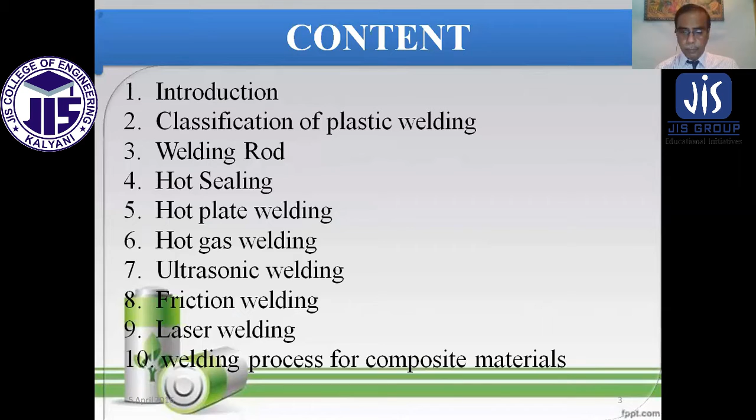Introduction. Mechanical fasteners, adhesives, and welding processes can all be employed to form joints between engineering plastics. Mechanical fasteners can join two components quickly, but they do not provide a leak-tight joint, and localized stress may cause them to pull free of the polymeric material.

Adhesives can provide good properties and fully sound joints, but they are difficult to handle and slow to cure. Also, joint preparation and surface cleanliness need to be given importance in adhesive bonding.

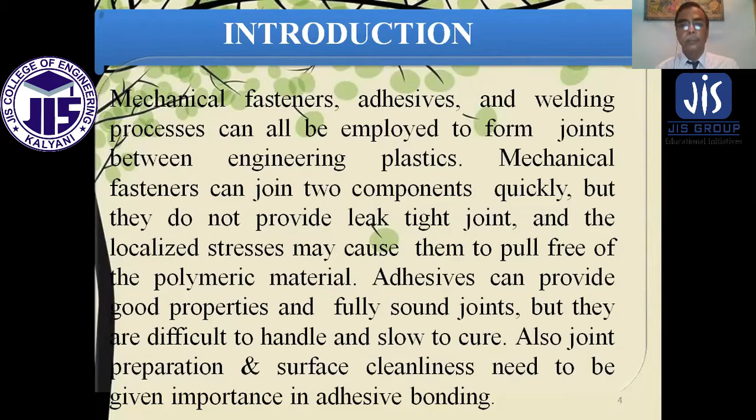Welding can be used to produce bonded joints with mechanical properties that approach those of parent materials. Plastic welding is confined to thermoplastic polymers, because these materials can be softened by heat.

Thermosetting polymers, once hardened, cannot be softened again on heating. The heat required for welding thermoplastic polymers is less than that required for metals.

Plastic welding processes can be divided into two groups. One involves mechanical movement: ultrasonic welding, friction welding, vibration welding. The other involves external heating: hot plate welding, hot gas welding, resistive welding, and implant welding.

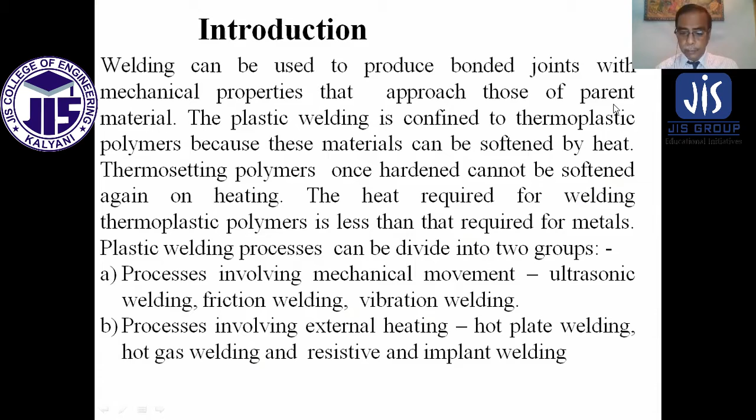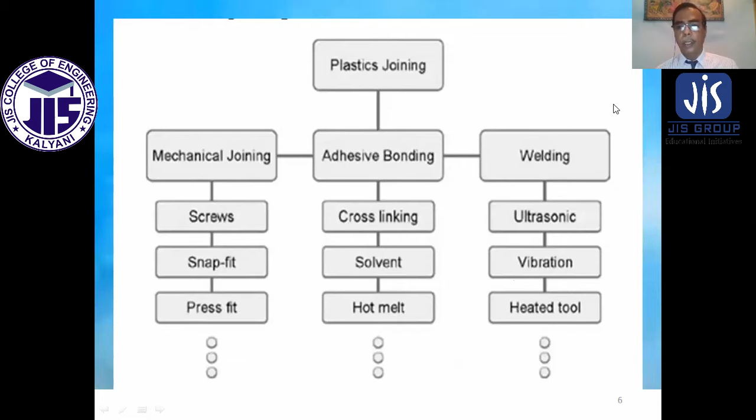This is the structure of plastic welding joinings. There are three types: mechanical joining such as screw, snap fit, press fit etc.; adhesive bonding such as cross linking, solvent, hot melt; and welding, which includes ultrasonic, vibration, and heated tools.

Classification of plastic welding. Welding processes are categorized by the heating method used. Two general categories are external heating and internal heating.

External heating relies on convection and conduction to heat the weld surface, including hot tool, hot gas, extrusion, implant induction, and implant resistance welding.

Internal heating relies on conversion of mechanical energy into heat through surface friction. It is further divided into internal mechanical and internal electromagnetic heating, such as ultrasonic heating, friction welding, laser welding, and RF welding.

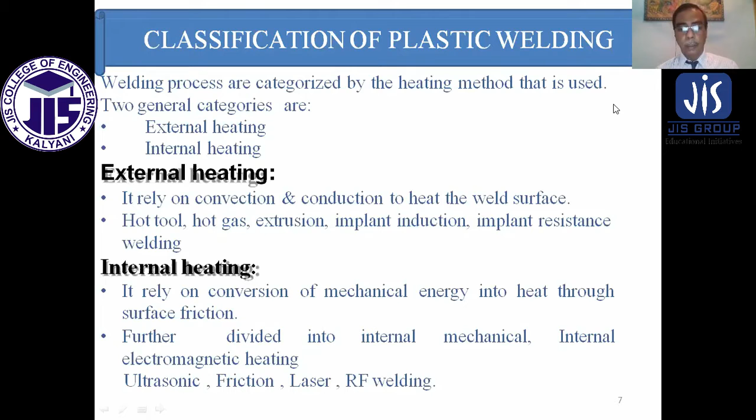Welding rod. A plastic welding rod, also known as a thermoplastic welding rod, is a rod with circular or triangular cross-section used to bind two pieces of plastic together. They are available in a wide range of colors to match the base material's color. A spool plastic welding rod is known as a spline.

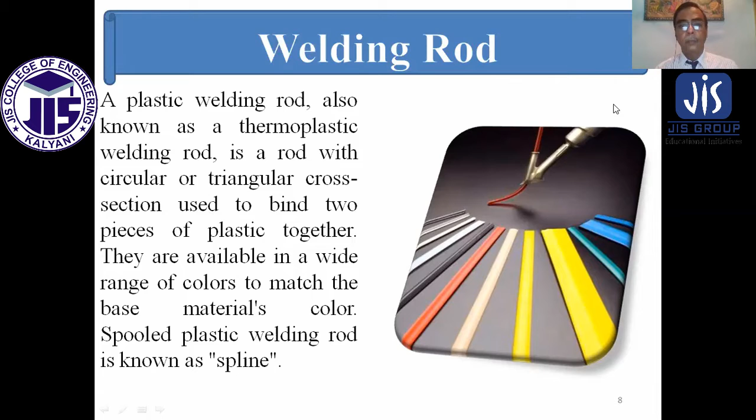Heat sealing is the process of sealing one thermoplastic to another similar thermoplastic using heat and pressure. The direct contact method of heat sealing utilizes a constantly heated die or sealing bar to apply heat to a specific contact area or path to seal or weld the thermoplastic together. Heat sealing is used for many applications, including heat seal connectors, thermally activated adhesives, and film or foil sealing.

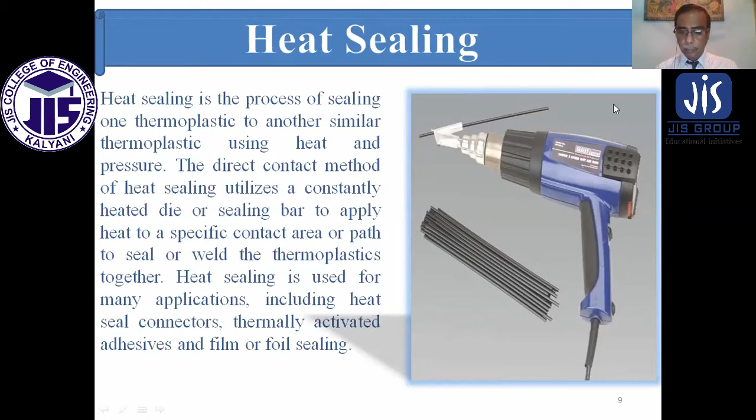High temperature hot plate welding: the tool is not coated with release agent and is heated to 300 to 400 degrees centigrade. Once the part is disengaged from the tool, any residual material is either oxidized away or mechanically removed.

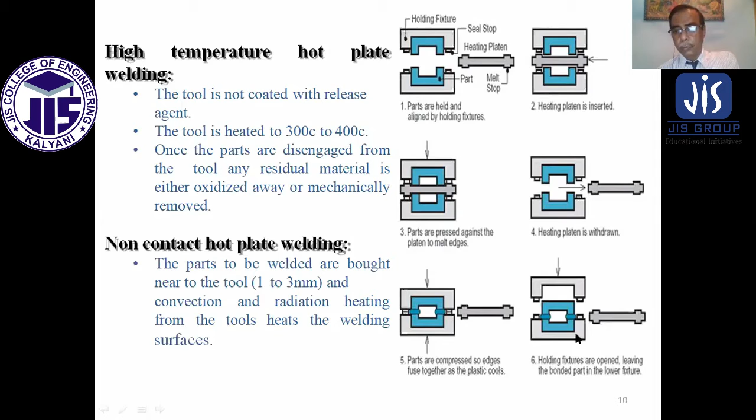Applications of hot plate welding: polyethylene pipe welding for gas line installation, and fuel tank assemblies for the automotive industries.

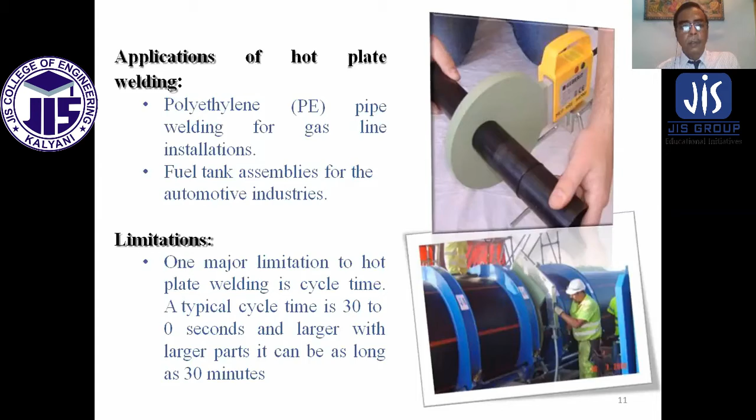Hot gas welding is similar to oxyacetylene welding of metals. The only difference is that the open flame of oxyacetylene welding is replaced by a stream of hot gas—compressed air, nitrogen, hydrogen, oxygen, or carbon dioxide—heated by an electric coil as it passes through a welding gun.

The process, invented in the mid-20th century, uses a stream of heated gas, usually air, to heat and melt both the thermoplastic substrate material and the thermoplastic welding rod. To ensure welding takes place, adequate temperature and pressure must be applied to the rod, along with the correct welding speed and gun position.

This shows how the welding is done: the hot gases are applied and pressure is given, so the joint is completed.

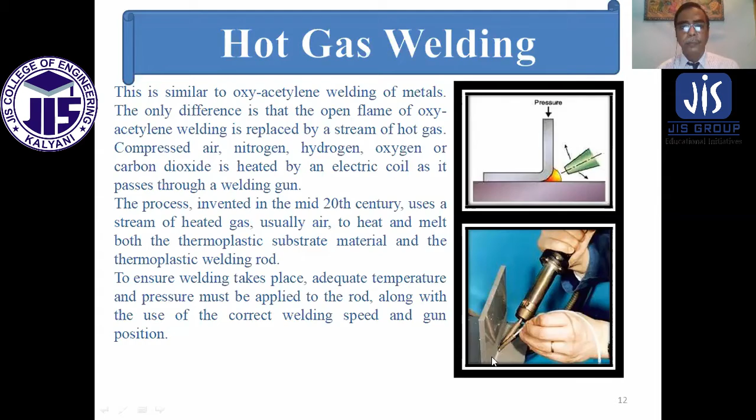Applications of hot gas welding: it is used to fabricate pipelines, pond liners, and a wide variety of vessels, and to easily join broken plastic.

Advantages: easy to use, thermoplastics can be welded easily. Limitations: it is a slow manual process and cannot be used in mass production.

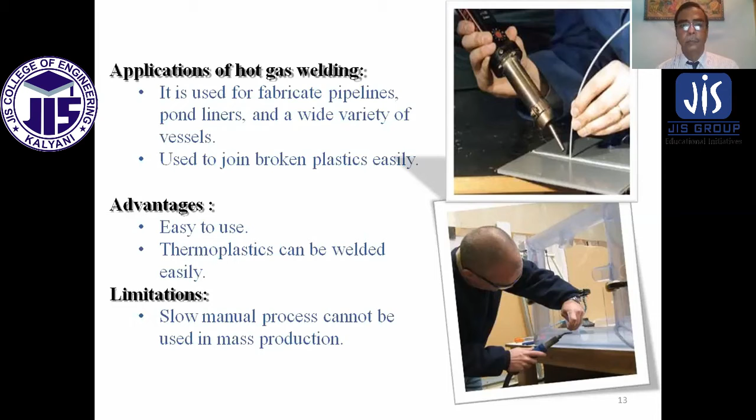Ultrasonic welding. This method uses mechanical vibration of high frequency to form the joint. The parts to be assembled are held together under pressure between the oscillating horn and

the immobile anvil and are subject to ultrasonic vibrations of frequency 20 to 40 kilohertz at right angle to the contact area. Alternating high frequency stresses generate heat at the joint interface to produce a good quality weld.

Ultrasonic welding is divided into two major groups: near field and far field. Near field is when the distance between the horn and the welding interface is less than 6 millimeters. Far field is when the distance between the horn and the weld interface is greater than 6 millimeters.

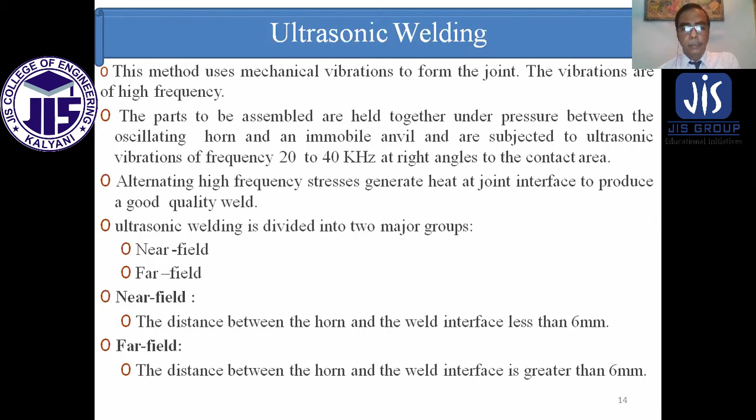This is a horn, or sonotrode, shown here.

Advantages include mass production suitability because the welding time is comparatively short, applicability for both amorphous and semi-crystalline thermoplastics, and it is used to bond dissimilar materials.

Limitations: horn size is limited by design constraints, and the process and tool must be adapted to the materials being welded.

Applications include food packaging, computer components, with a challenging and critical application being the standard disposable butane lighter. This figure shows ultrasonic welding of pneumatic pistons and transducers.

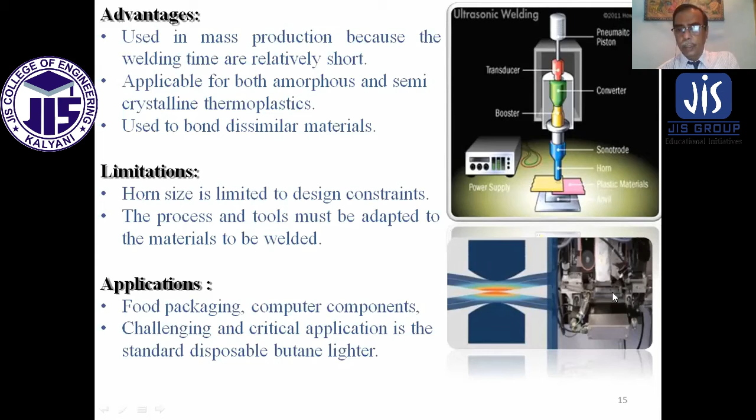This is the converter, booster, sonotrode (horn), and this is the material. This is the joining process, and this is the machine - practical machines where the welding is performed.

Friction welding of thermoplastics, also called spin welding, is based on the same principle as employed for welding metals. In this process, one of the substrates is fixed while the other is rotated with controlled angular velocity, as we have already discussed in friction welding.

When the parts are pressed together, frictional heat causes the polymer to melt and a weld is created on cooling. The major welding parameters include rotational speed, frictional pressure, forge pressure, weld time, and burn-off length.

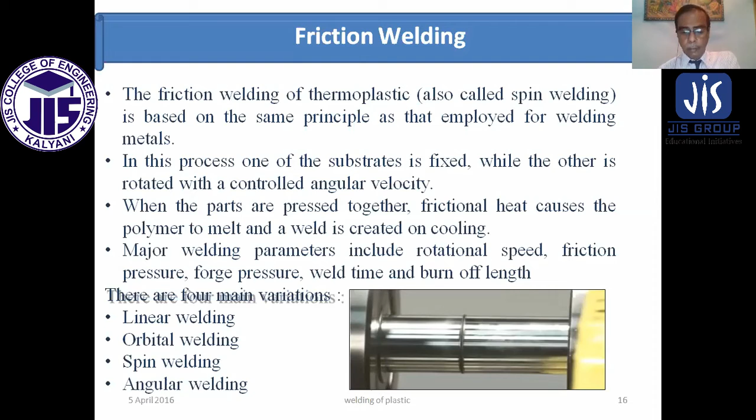There are four main variations: linear welding, orbital welding, spin welding, and angular welding - just like in metal friction welding, these are the four types.

The advantages of friction welding are high weld quality, simplicity, and reproducibility of the process. Limitations: it is suitable only for applications in which at least one of the components is circular and requires no angular alignment. Applications include thermoplastic manifolds for the automotive industries.

This is the thermoplastic manifold for automotive industries.

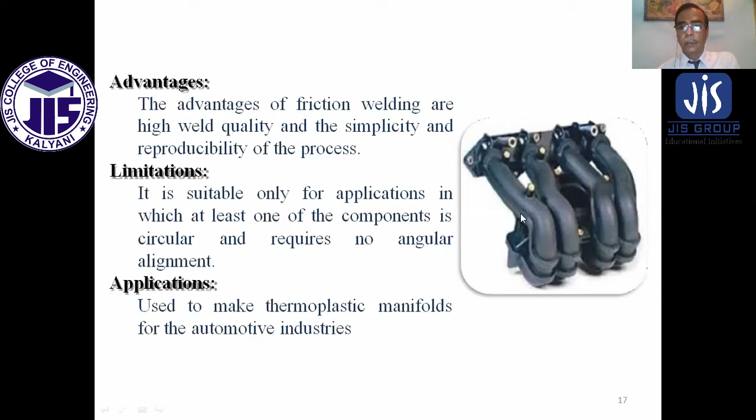Laser welding. There are two modes of laser beam welding: surface heating, and through transmission infrared welding.

The surfaces of the components to be joined are heated by direct IR or laser exposure, the direct radiation, for a sufficient length of time to produce a molten layer, usually 2 to 10 seconds. Once the surface is fully melted, the IR laser tool is withdrawn from between the parts.

The parts are forged together and the melt is allowed to solidify. Through transmission infrared welding is based on the concept of passing laser radiation through one of the components to be welded

while having the second component absorb the light at the interface. This absorption results in heating and melting of the interface, allowing the welding.

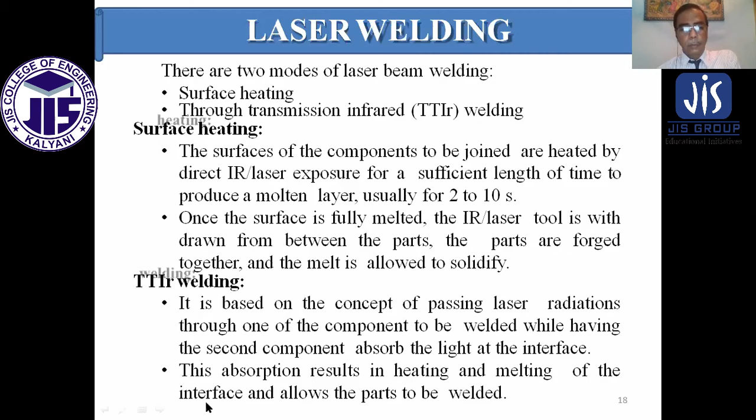Advantages of through transmission infrared welding: it is a pre-assembled method with speed and flexibility. It can also weld unsupported internal walls with complex curvature, given suitable optical properties.

Weld quality is very good. This is the laser beam, as you can see - laser beam, transparent polymer, and the absorbing polymer.

Limitations of TTIR welding: one of the components must be relatively transparent to IR radiation. This shows the moving direction and the laser beam.

Applications include brake fluid reservoirs and automotive marking lights - these involve the joining of transparent polymer to non-transparent absorbing polymer.

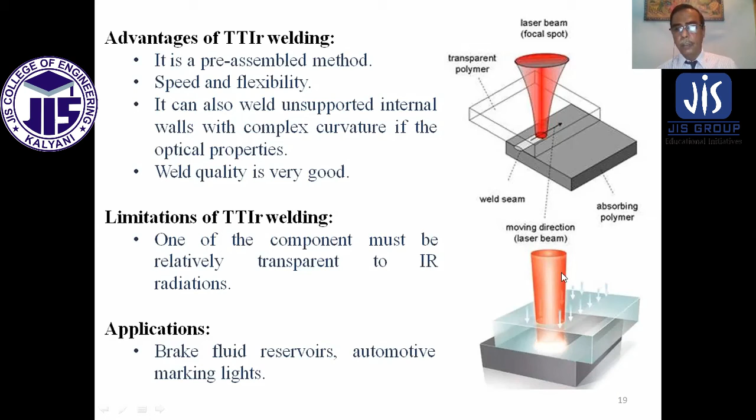Welding process of composite materials, very important. Composite material, thermoset composite welding, unprocessed epoxy resin, thermoplastic film - strong interphase formed,

thermoplastic welding, strong interphase formed - this is the joining, with unprocessed epoxy resins.

This is thermoplastic welding, and this is thermoset composite welding.

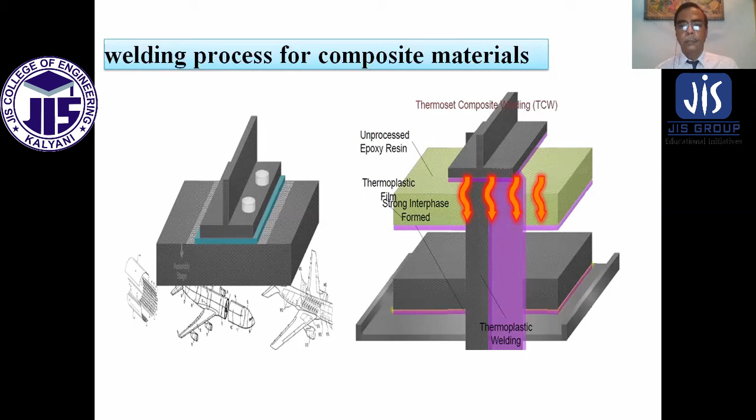These are the applications - thermoplastic welding used in automobile industries and also in industrial products, furniture, etc. being made, and thermoplastic epoxy resin.

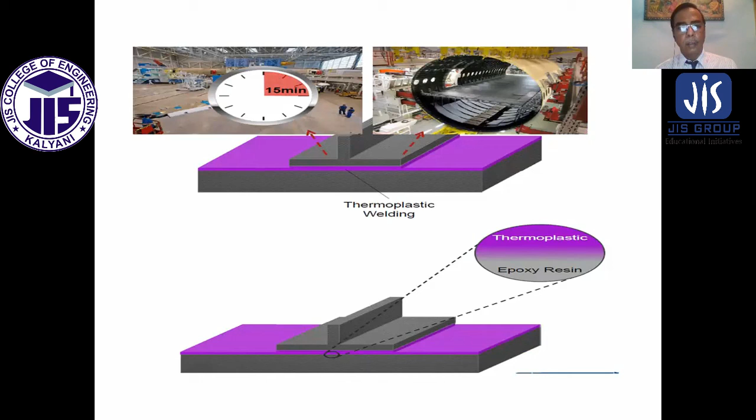These are the joinings being used in automobiles, cars, cycles, etc. Mechanical joints, mechanical analysis, thermoplastic epoxy resin, and joining - this is very important.

Mechanical resin, mechanical analysis for larger sizes, atomic force microscopy, and this is chemical analysis - this is scanning electron microscopy. Just see the figure.

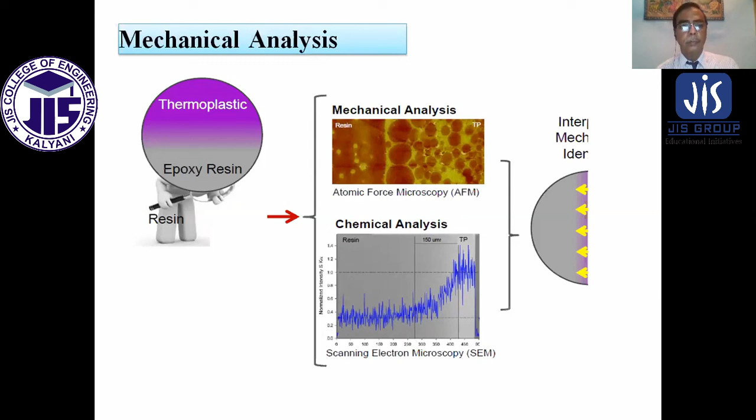Applications - understanding the process, it can be applied to aircraft applications in aerospace.

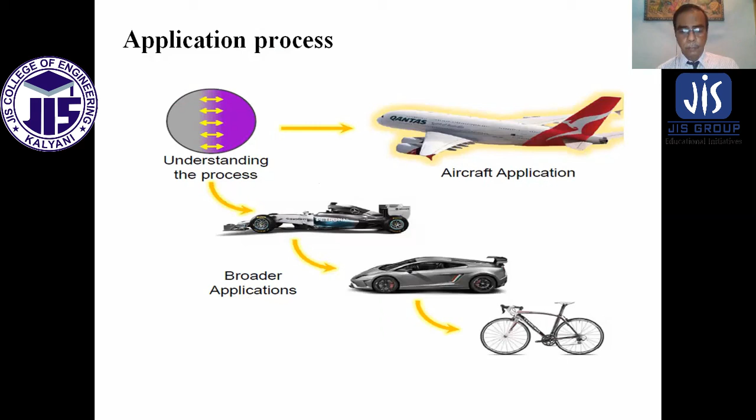This is for toys - it can be applied to varieties of toys. The broader application is in cars and cycles. So there are wide applications of composite material in different areas.

References: E. Paul DeGarmo, J. T. Black, Ronald A. Kohser, Materials and Processes in Manufacturing, Prentice Hall, India. Robert A. Grimm, Welding Processes for Plastics, Advanced Material and Processes, Volume 147, 1995.

Joining Plastics in Production, the Welding Institute, TWI. Grewell D.A., Benatar A., Park J.B., Plastics and Composites Welding Handbook, Hanser Publishers, Munich.